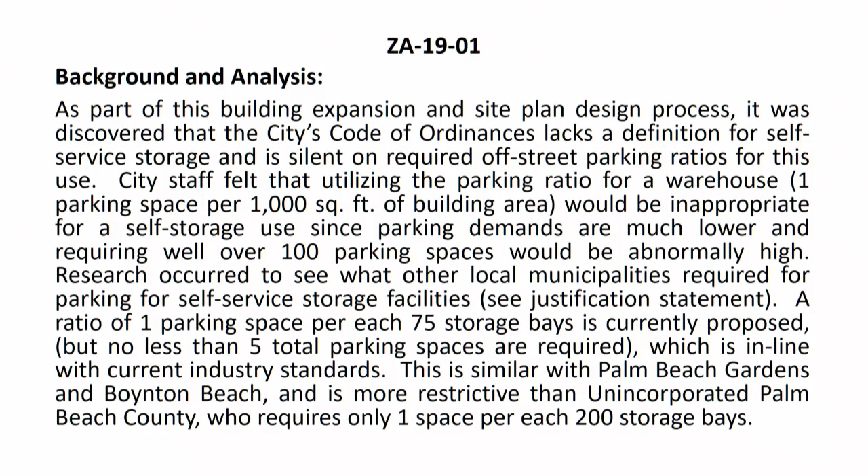We looked at a storage category just for self-storage use, at a ratio of 1 space per every 75 units, with the caveat that some municipalities use a much more flexible ratio where they allow 1 parking space.

Finally, the off-street parking ratios would be amended by adding the new minimum of 5.

So we'll go ahead and start with Mr. Wiley. I have no questions at this time. Okay, Mr. Hunt?

Here's an aerial view of the site. And as we get a little closer, you can really see that the new ownership group does want to improve the site. Previous ownership group did not maintain it to standards that most would, so we're happy to see that the new ownership group is here and they're looking to renovate this site. Kind of excited about the new building facade and landscape package. I think it'll be a really nice addition to Blue Heron.

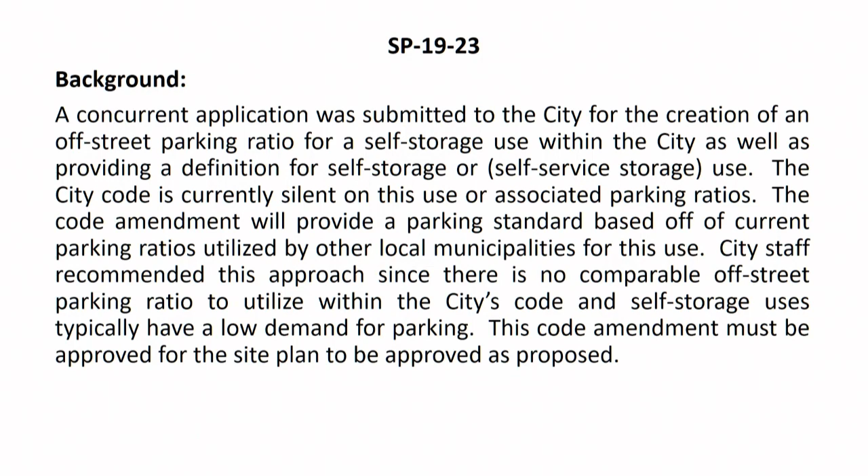Again, this is taken directly from the staff report. I did just mention the facade improvements and the landscaping improvements. In total, if this proceeds, it will result in 120,983 total square feet of building area for self-storage use. This is referring to the fact that the concurrent application was provided for the text amendment that was just discussed by the board, and it is really tied to that ordinance proceeding because there are site characteristics that are reliant on that ordinance proceeding.

So for the record, here is the site plan. This is just zooming in a little closer for everyone's ability to see it because the text is rather small. I do call out here, this is the existing building area in yellow, and the new proposed addition is called out in green. As discussed previously, it does form almost a horseshoe pattern where most of the internal storage use would be shielded from view from the street. Additionally, there'll be heavy landscaping as well as fencing around the interior storage areas.

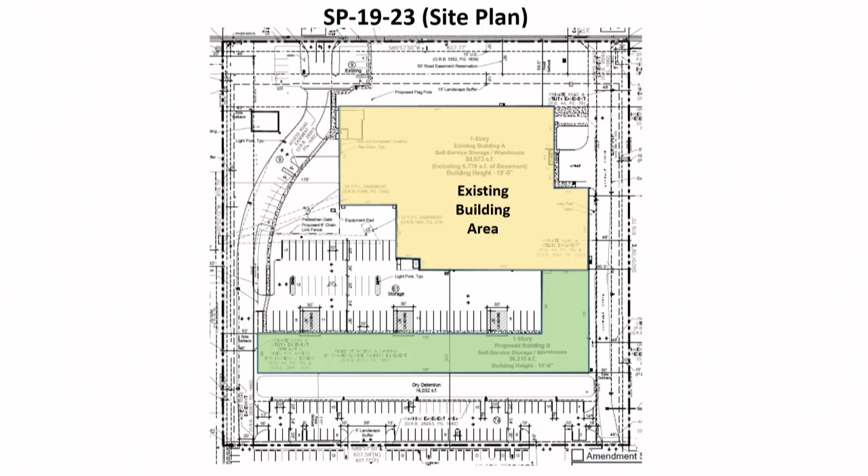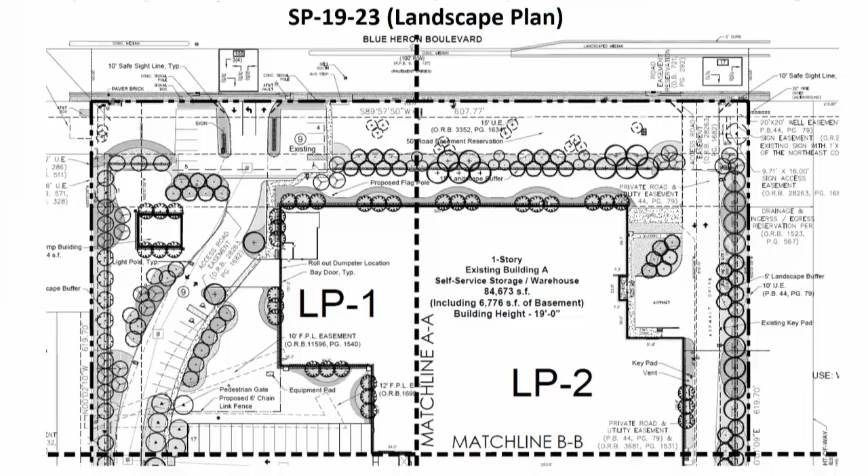For your record, the landscape plan is attached as Exhibit B, and here are the 4 cut sheets because it's a larger site. What I did here was zoom in on 2 of those cut sheets that front Blue Heron Boulevard to really allow the board and general public to see how there will be a new landscape facade included. That's following our principal arterial design overlay guidelines, which were approved, or amended, a few years back to really push future development to provide a nice landscape package and to try to create a uniform design along Blue Heron Boulevard.

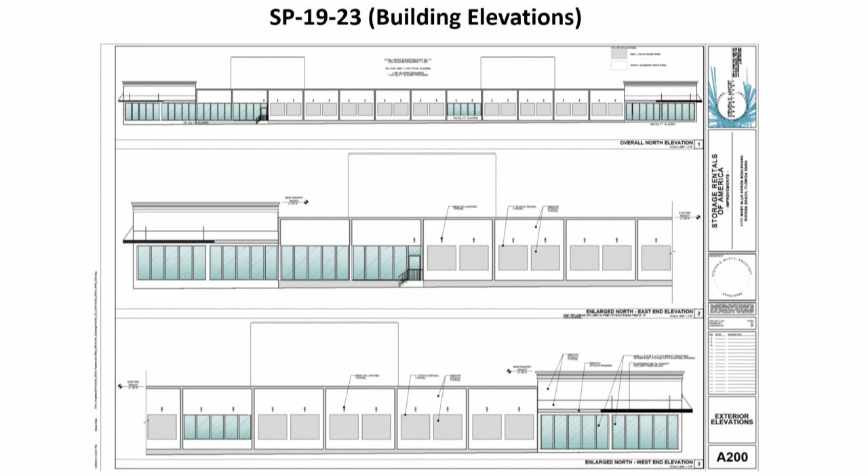Here is the proposed building elevation for the site. The top image is the full view from Blue Heron Boulevard, and the next 2 are just the sides of that top building elevation. What we did here is provide a comparison of the existing building facade with the proposed. The proposed is up top. You can see it'll be a nice, really clean design. There'll be much glass exterior, and what isn't really demonstrated on the rendering is how the landscaping will really improve the site and shield a lot of the building from view, more or less.

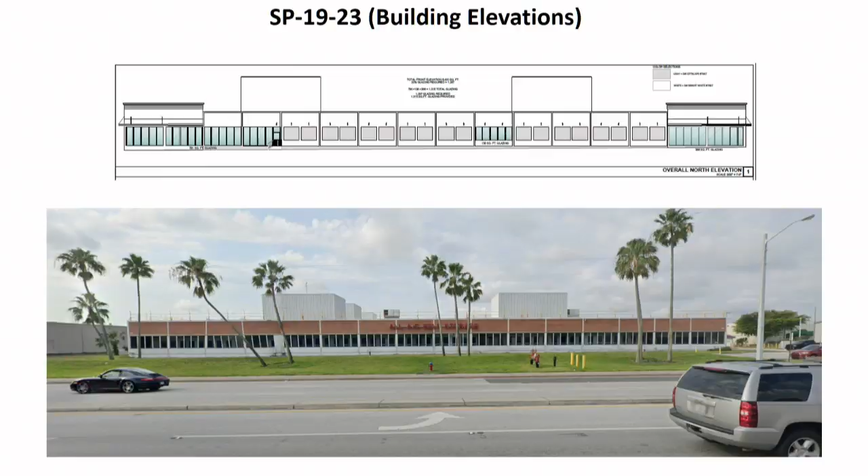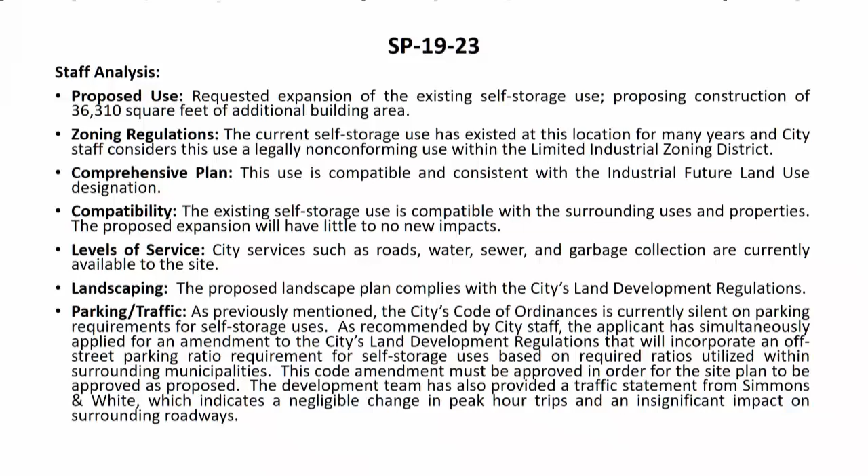So just for the record, the staff analysis is provided from our staff report in the PowerPoint, and staff is recommending approval with the following conditions. The first is that a 2-year landscaping performance bond for 110% of the value of landscaping and irrigation shall be required before a certificate of occupancy or certificate of completion is issued. The second is that construction and landscaping improvements must be initiated within 18 months of the effective date of this resolution, in accordance with section 31-60B of the city's code.

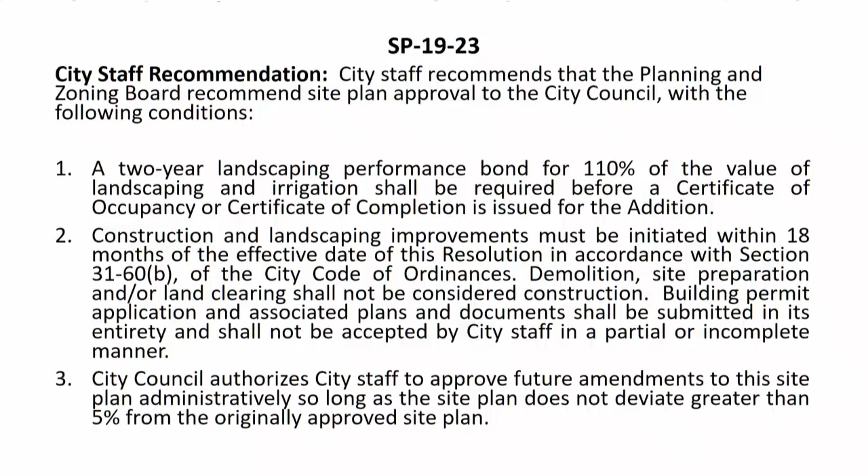Number 3 is the city council authorizes city staff to approve future amendments to the site plan administratively, so long as the site plan does not deviate greater than 5% from the originally approved site plan. The fourth is that this development must receive final CO from the city for all buildings and units approved within 5 years of the approval of the adopting resolution, or that adopting resolution shall be considered null and void.

Number 5 is all future advertising must state the development is located within the city of Riviera Beach. Fees and penalties in accordance with City Code Section 31-554 will be levied against the property owner and/or business for violation of this condition. Number 6, once approved, this resolution shall supersede any previous site plan approval resolutions associated with this property, causing previous site plan approval resolutions to be null and void. Number 7 is that the applicant shall consult with the Riviera Beach Police Department in order to incorporate one or more internet protocol, IP, cameras, within their site design for Riviera Beach Police Department use.

Number 8 is the concurrently processed ordinance associated with creating an off-street parking ratio for self-storage use, which must be approved and adopted prior to the site plan approval becoming effective.

And finally, number 9, prior to the approval of city building permit, the applicant shall provide a drainage report sufficient to demonstrate compliance with the city and South Florida Water Management District regulations, specifically demonstrating compliance with City Comprehensive Plan Infrastructure Element Policy 1.5.3.

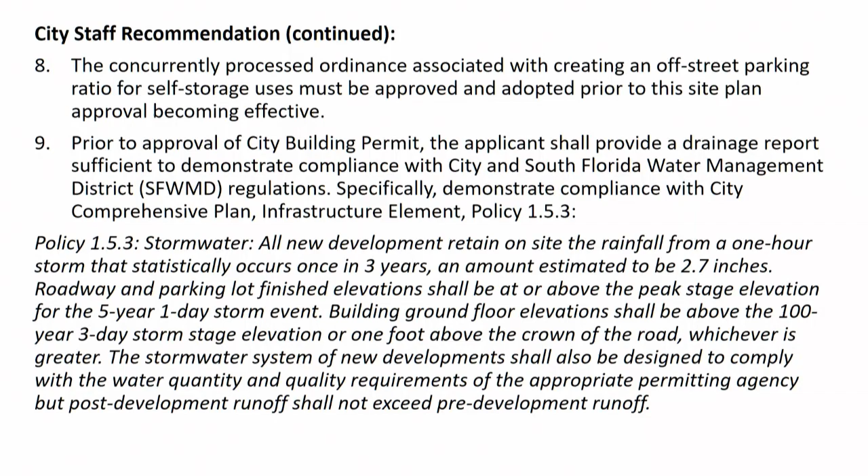So the applicant is available to answer any questions, and I'm also here to answer any questions at this time.

Okay, so there are no public comment cards on this item, so we'll go ahead and hear from the applicant if the applicant would like to speak. Yes, Madam Chair, they would like to present as well.

Thank you, Jeff, I appreciate it. For the record, Josh Nichols with Schmidt Nichols.

Again, just showing, I thought this was great that Jeff had this in here of the current condition. As you can see, it's a little dated, a little worn, and was in need of some updates. So it's just good to see, this and the next project you're going to hear are both in this immediate vicinity on Blue Heron, and really going to spruce up the corridor.

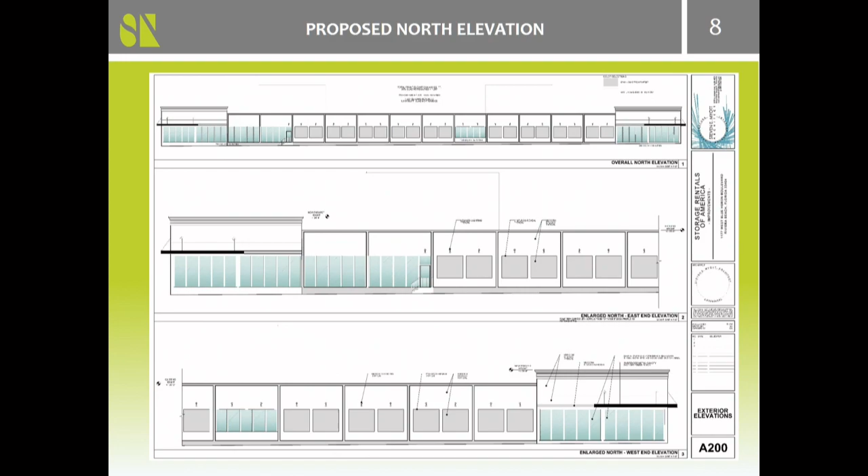So again, with that, just wanted to mention those few items. I'd be happy to take any questions. Thank you.

We'll start with the board comments with Mr. Wiley. I don't know whether this question is for yourself or Mr. Gagnon. I want to ask, the building that's located directly behind you, who operates that building? Do you? Yeah, so let me go back to the site plan. So that's a FedEx distribution facility. Okay, so and again, I didn't bring this up because it's not really part of our project, but there is a cross parking agreement that was entered into between the subject parcel and the FedEx.

So those additional spaces are for the use of the FedEx, and there's 2 access points through the subject property to allow them access. Okay, because I actually used to manage that FedEx back there. That's why I was asking to see if it was still back there. Absolutely. The question I have for you, there's a lot of traffic going through there for FedEx throughout the course of the day, even usually late at night also with late trucks coming in, especially at Christmas time.

Is there a security separation between coming from your entrance there for your building going to FedEx? Is that separated, or is that something that you guys are going to share? No, so this drive is obviously open, right, to keep, but there is fencing that comes, it touches the building here, connects, comes over, and then crosses here and connects here. So this entire yard area, I guess you could say, is all fenced in and secured.

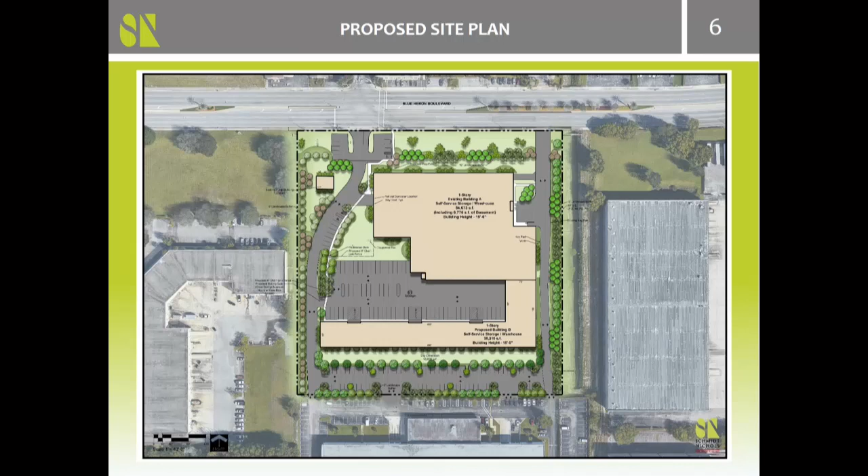All right, so now with the trucks coming through that area, because like I say, some of the trucks are pretty large, would those vehicles there be protected also? And was it made to actually accommodate those larger vehicles going through there without any damage to any other vehicles or any private property in that area? Absolutely. So that's a standard size drive aisle, and there's actually an access road easement, and that encompasses basically that driveway. So we maintained, just looking for, it's 20 feet in sections, and it looks like it goes out to 24 feet in some other sections.

So there's plenty of room for trucks to be able to maneuver through there. So we had to maintain that as part of the access easement. So during certain parts of the day, what was your access for that building? Will it be 24 hours? No, not 24 hours, no. What would the later hour be? 9 a.m. to 5:30 p.m.

To 5:30. All right, because I just wanted to see if that would actually interfere with the FedEx building, with the vehicles that are coming in at that time, and would that traffic coming through that area hurt your operation? It's a very low traffic generator, the storage, and they're currently operating now with this same situation. So, you know, we will be adding a little bit of square footage, but I don't think it will impede on anything. Okay, just want to make sure.

Thank you. Mr. Hunt? Yes, I applaud your mention of the tie-down hooks and things of that sort, so I would strongly encourage you to take a look at that as a good option, and if so, perhaps suggest it back to the city for something that we should consider for future projects and things of that sort. I mean, I think that's a very prudent strategy. Still does not absolve the owner of the vehicle or the boat from paying good attention, but having that there makes it a lot less easy to ignore. Absolutely. That's all I have.

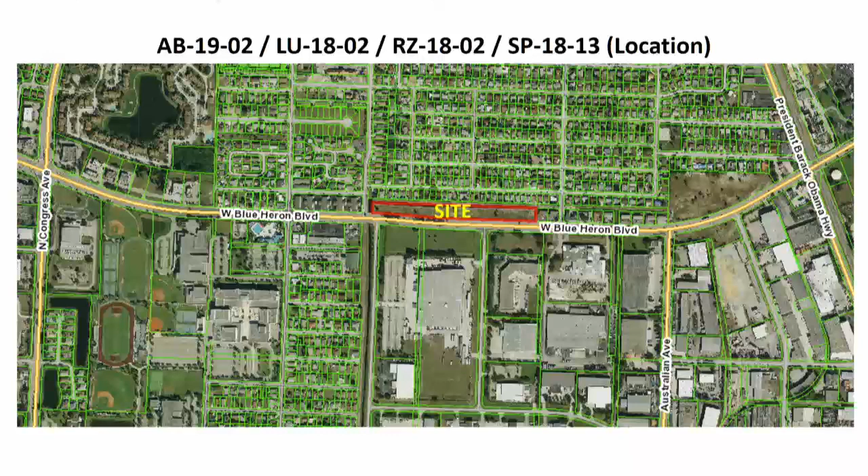So you have before you a location map depicting the site. As we go a little closer, you can see it's on the north side of Blue Heron, just south of West 23rd Street, bookended by Avenue O and R.J. Henley Avenue. From this aerial, you can somewhat see there is a canal running on the north side of the property, and we have a few other images later on that depict it a little more clearly.

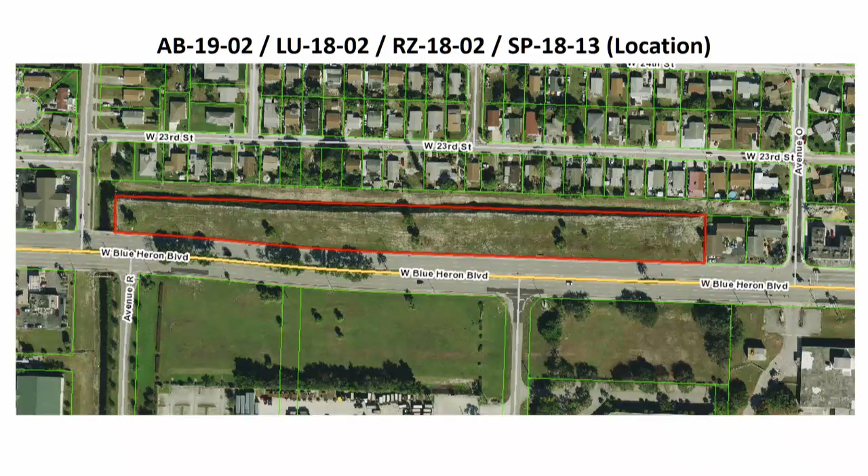So this image was taken just from Google Earth, and if you're familiar with the site, you will understand the true length of the parcel. I believe it's approximately 1,400 feet in length, plus or minus 100 feet or so.

So this is a very long, linear piece of land. We believe that the length of the property and the format of the property has provided difficulty in development. So we're trying to come up with some solutions to that.

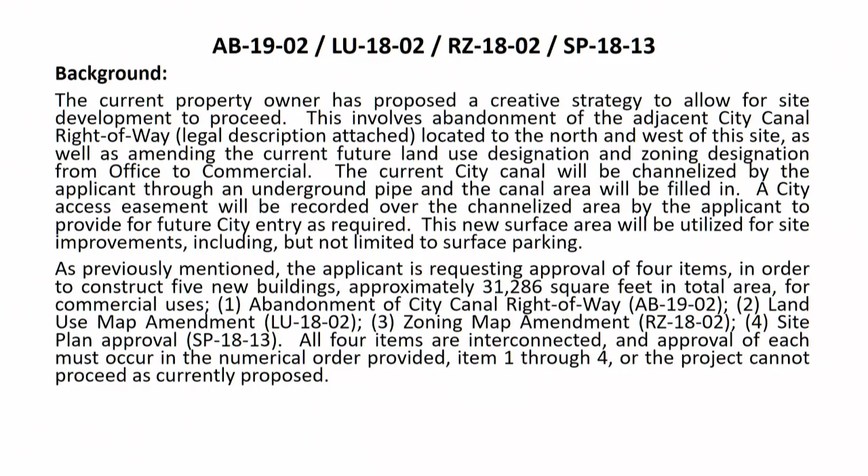And the design team will be able to expand upon some of the buffering that's proposed with the adjacent residential uses to the north. They're also looking into the best approach to ensure that there's no water management issues to those properties to the north, and the design team has a strategy for that as well.

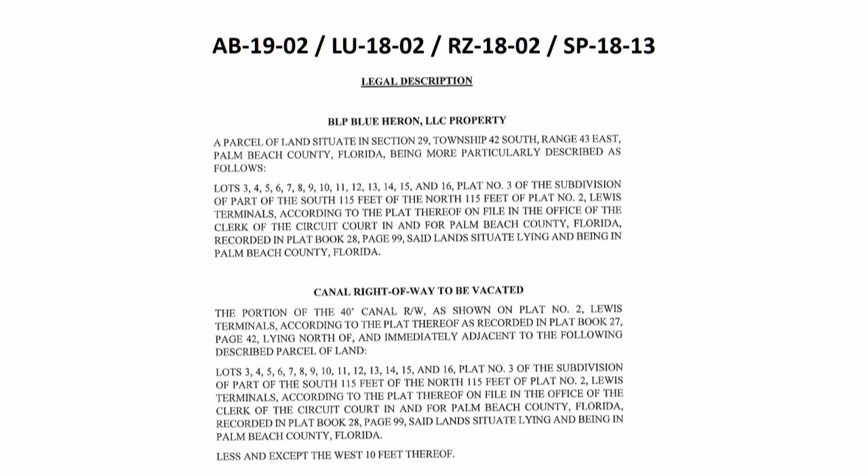Just for the record, the legal description for both the parcel and the proposed canal right-of-way to be vacated is provided in the staff report and also provided before you tonight.

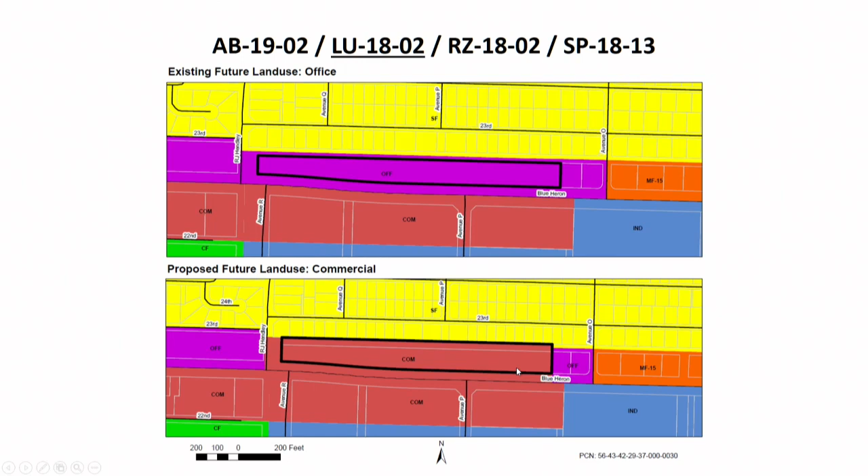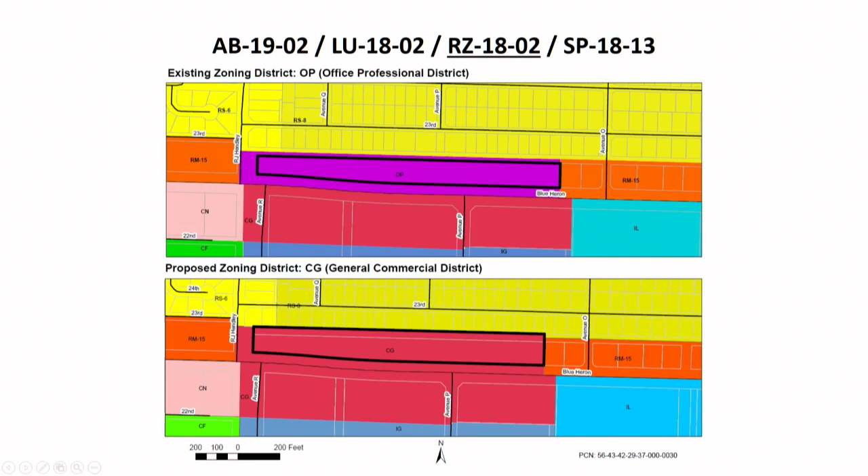This image is depicting the zoning map of the city. The above image is the current zoning of office professional, shown in this magenta color. The proposed zoning amendment would result in a general commercial zoning designation as demonstrated with this red color on the bottom image. As you can see, the future land use and zoning directly to the south also would be consistent with general commercial or commercial for future land use and zoning.

So the staff analysis, again, was taken from the staff report. As far as services, the existing city services required to develop the site all exist. The ultimate use is really for commercial, retail, restaurant, and medical type use within these 5 standalone buildings.

Staff believes that if the zoning amendment proceeds, the development would be consistent with zoning regulations. Similarly, the comprehensive plan would be compatible and consistent so long as the desired comprehensive plan amendment also proceeds. We see that this redevelopment of the site would be compatible with the surrounding and adjacent uses, and additional attention will be provided to ensure that compatibility is maintained, especially with the residential uses just to the north.

We touched upon it briefly with the other project, but the landscape design is going to be in line with our principal arterial overlay standards, so we think you'll be very pleased with the landscape palette that's provided. Parking and traffic meet the county's traffic performance standards, and the traffic performance standard review letter is provided within the packet tonight.

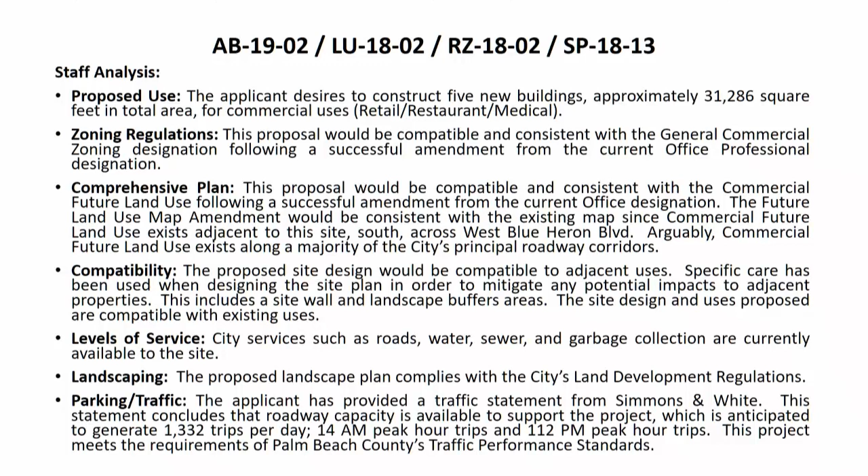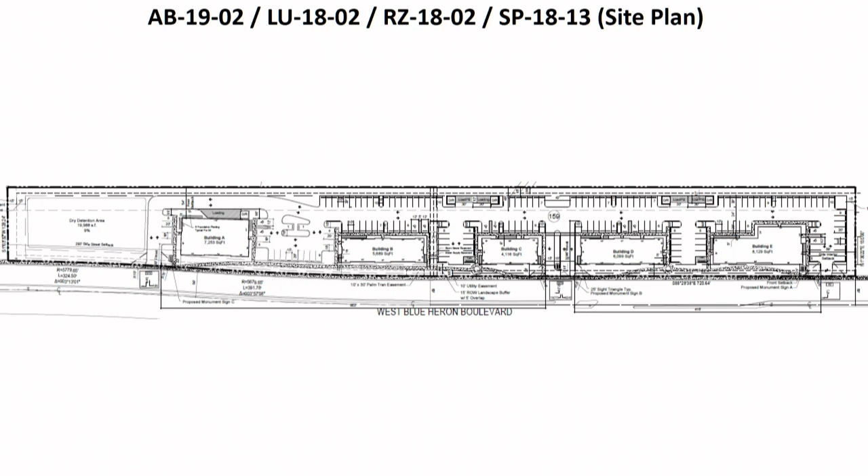That's because you don't have water. Yeah, I have my side water here. Maybe I just need to take a sip from it. We don't have water, that was the hint. I'll share mine if you'd like to. We can get water. Okay, we will get water, thank you.

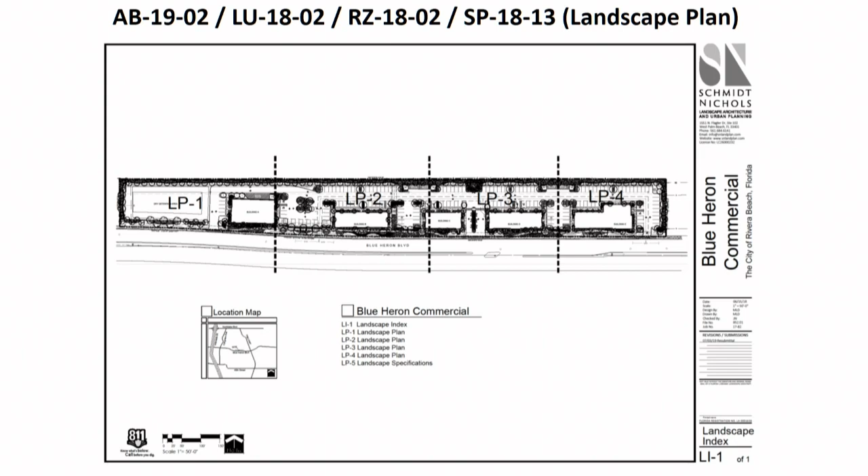For the record, before you is a landscape plan. Because it's such a long linear site, there are 4 sections. I have zoomed in on that so you can get a feeling for the landscape design and landscape palette. The design team likes to hoard their nice color renderings until their presentation, and they don't share them with me, so I'm sure they'll provide them in their presentation.

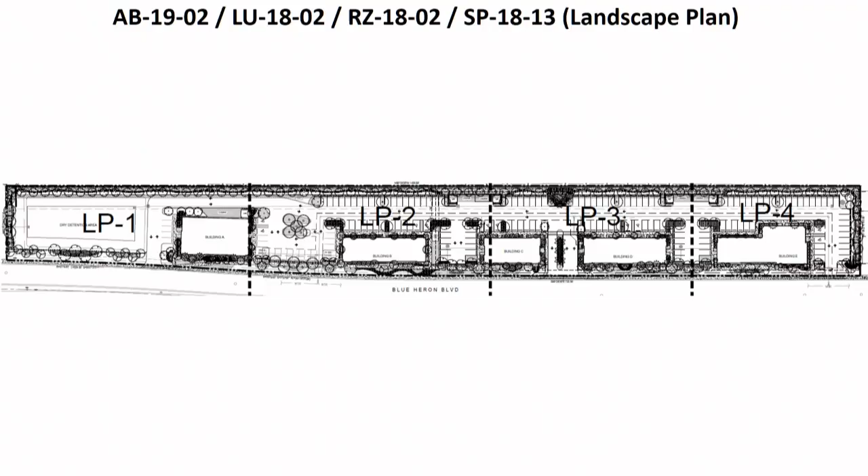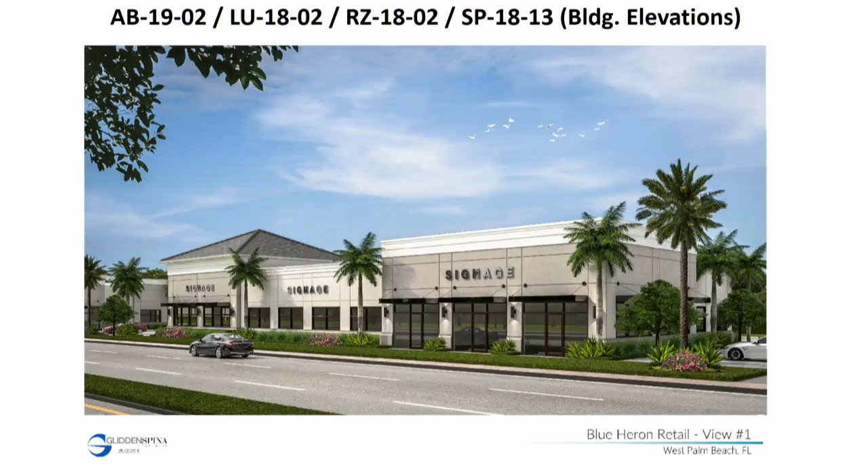But I think you'll be really pleased with the landscape proposed as well, and also with a lot of the treatment to the north side of the site, where we were very conscious of the existing residential community. We want to make sure there really are the least amount of impacts as possible for use of this site, and that any anticipated uses would have been mitigated in some way, shape, or form. So here is a rendering of the site. This is going from...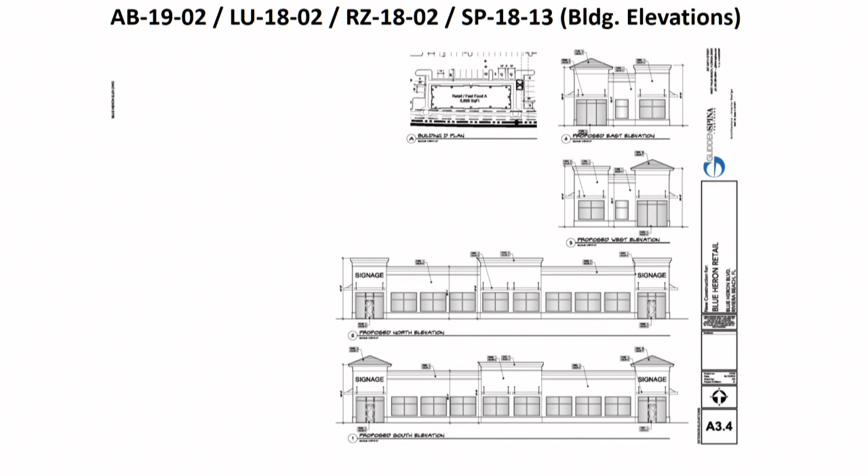So the building elevations, they're not really as pretty and colorful as the rendering, but I want to provide them for informational purposes and for the record. Each building has its own building elevation sheet. So this is sheet A3.1, A3.2, A3.3, A3.4, as well as A3.5. All the building design is consistent, and they will all be the same design as demonstrated before.

At this point, I'd like to continue with staff recommendation for each item, and then we can go into board comments and public comments on each individual item respectively, if that pleases the board.

So city staff's recommendation for the abandonment proposal, which is AB-19-02: city staff is recommending that the P&Z board recommend approval to the city council of this canal right-of-way abandonment with the following conditions of approval. The applicant shall provide a city access easement identical to the legal description of the city canal right-of-way abandonment area in order to ensure access in perpetuity following city council approval and adoption. Prior to the city canal right-of-way abandonment becoming effective, the applicant shall prepare and ensure recordation of the city's access easement within the official records of Palm Beach County, with proof provided to the city's Development Services Department.

Condition number 2: following city council approval and adoption of this abandonment ordinance, and prior to the city canal right-of-way abandonment becoming effective, the applicant shall provide the city with a construction performance bond for 110% of the value of the cost to channelize, or pipe and fill, the existing city canal. This performance bond may be utilized by the city to pay for channelization of the city canal in the event that the applicant fails to complete the channelization of the project within 2 years of the effective date of this ordinance. If the city utilizes the construction performance bond, the applicant also authorizes the city to place a lien on the property for an amount equal to any additional channelization and fill construction costs that exceed the value of the bond. This condition intends to further incentivize the applicant to complete the channelization or piping project and helps protect the city from financial risk.

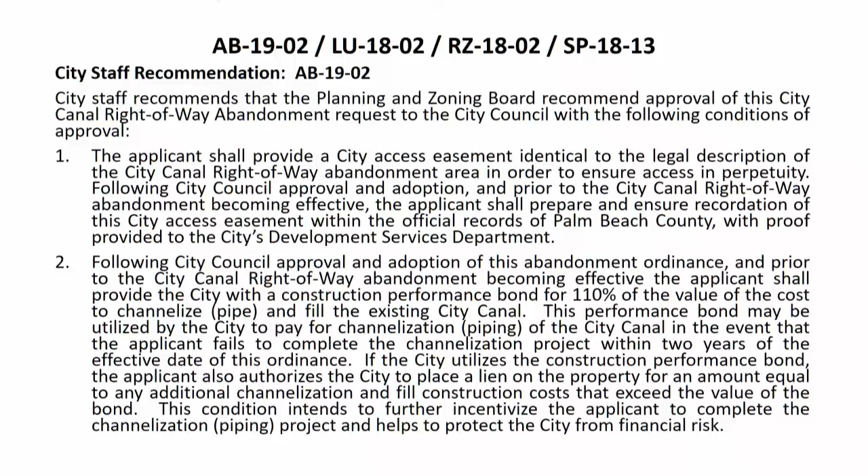Condition number 3: the applicant is responsible for any and all costs associated with channelization or piping of the existing city canal. The water management capacity of the newly piped canal shall be equal to or greater than the capacity of the existing canal. The final design of this infrastructure improvement shall be approved by the city's Public Works Department. The applicant must apply for and be issued one or more building permits prior to any site work commencing for channelization or piping of the existing city canal.

Condition 4: the applicant shall replat the city canal right-of-way abandonment area, AB-19-02, with the adjacent parcel known by PCN 56-43-42-29-37-000-0030, prior to the issuance of a certificate of occupancy for this location. This replat shall include the city's access easement that was required as a condition of approval for the abandonment.

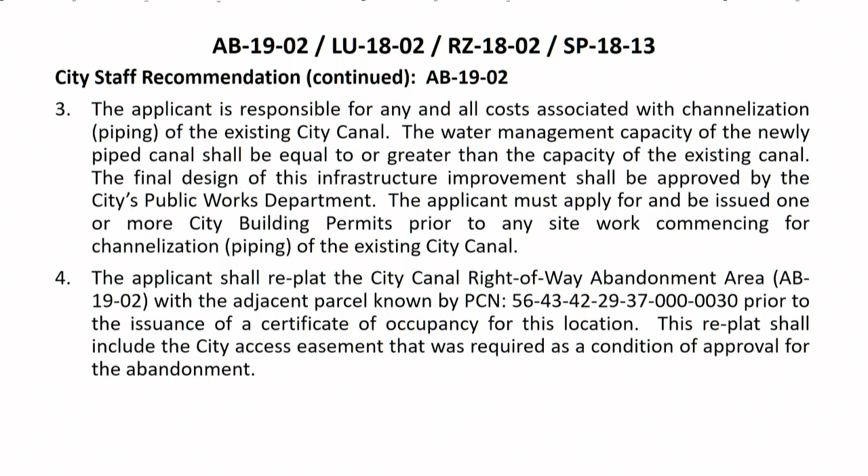That ends the conditions of approval and recommendation for the abandonment. Staff's recommendation for the future land use map amendment is that staff recommends the Planning and Zoning Board recommend approval for the future land use map amendment to the City Council, from an office designation to a commercial designation. That's staff number LU-18-02.

The next recommendation pertains to the rezoning request, which is RZ-18-02. City staff recommends that the Planning and Zoning Board recommend approval of the zoning map amendment to the City Council, from office professional to general commercial.

The fourth item is the city staff recommendation for SP-18-13. City staff recommends that the Planning and Zoning Board recommend site plan approval to the City Council with the following conditions. The first is a 2-year landscaping performance bond for 110% of the value of landscaping and irrigation shall be required before a certificate of occupancy is issued for the site.

The second condition is construction and landscaping improvements must be initiated within 18 months of the effective date of this resolution, in accordance with section 31-60B of the city's Code of Ordinances. Number 3, the City Council authorizes city staff to approve future amendments to the site plan administratively, so long as the site plan does not deviate greater than 5% from the originally approved site plan.

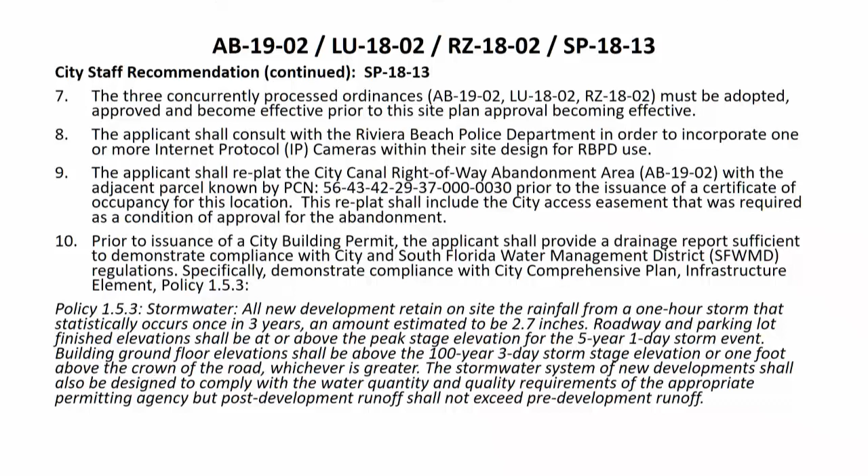Finally, condition 10: prior to the issuance of a city building permit, the applicant shall provide a drainage report sufficient to demonstrate compliance with the City and South Florida Water Management District regulations, specifically demonstrating compliance with City Comprehensive Plan Infrastructure Element Policy 1.5.3, which is listed in full for reference. That concludes staff's presentation.

I know that the applicant would also like the opportunity to present to the board at this time. We would love to hear from them.

Mr. Bain? Thank you, Jeff. Probably need to push to get it started. This up here? Yes, sir.

Good evening, ladies and gentlemen of the board. For the record, Seth Bain, with the firm of Lewis, Longman & Walker, here on behalf of the applicant. I'm joined tonight by the applicant, Mr. Stu Hankin. Josh Nichols of Schmidt Nichols is here as well, the site planner. We have the builder, general contractor with us tonight. And we also have Kyle Duncan from Simmons & White.

I obviously appeared before you very recently to discuss this project. At the conclusion of that workshop hearing, I left the building with my client. Then when I was reading the transcript a few days ago, I realized you had a very extensive and well thought out discussion about planning, the role of planning in your city, and the various jurisdictions involved in that. I know Mr. Hunt did a yeoman's amount of work exploring that. When I read that transcript, I realized there were a couple of very important concepts discussed that were extremely relevant to our project.

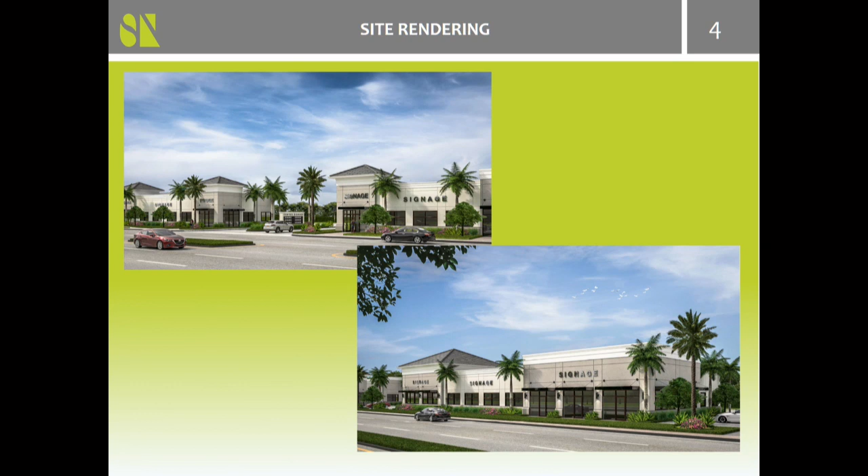We're trying to promote that sort of urban feel where you can see the buildings. You don't have a huge parking lot in front of them like some of your older traditional strip retail neighborhoods. You've got lovely architecture, a strong architectural landscape feel, and a meandering sidewalk through it.

The reality of this site is, even though it's extremely long, we're putting a far lower density than would typically be permitted in your general commercial zoning district, which allows a 1.4 FAR. That would be 200,000 square feet on this site of development, requiring many stories. We're maintaining a scale compatible with the neighborhood to the north that'll fit on the site, but the reality is the traffic generation by the site is very low, and there won't be a grocery store here, there won't be a Target, there's nothing attracting huge amounts of traffic.

These are smaller businesses that will attract people throughout the day—the sorts of businesses that, even if it were an office with a huge influx of traffic in the morning, that won't be the case here. The sorts of businesses here are the kind that will get a certain amount of traffic in and out throughout the day.

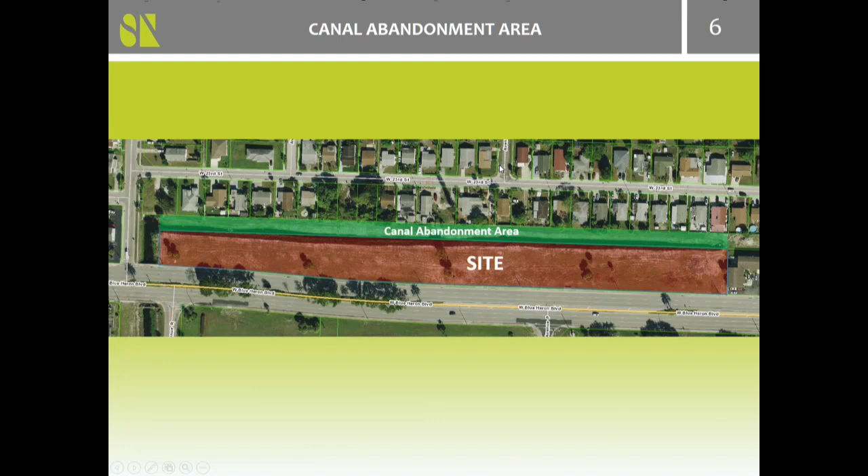That's the wrong button. That's it. Thank you. So now you're familiar—this is the site, we're asking for that 40-foot to be abandoned so it can be incorporated into it, with the conditions that Jeff has read before you this evening. We've reviewed those conditions and accept all of them as proposed.

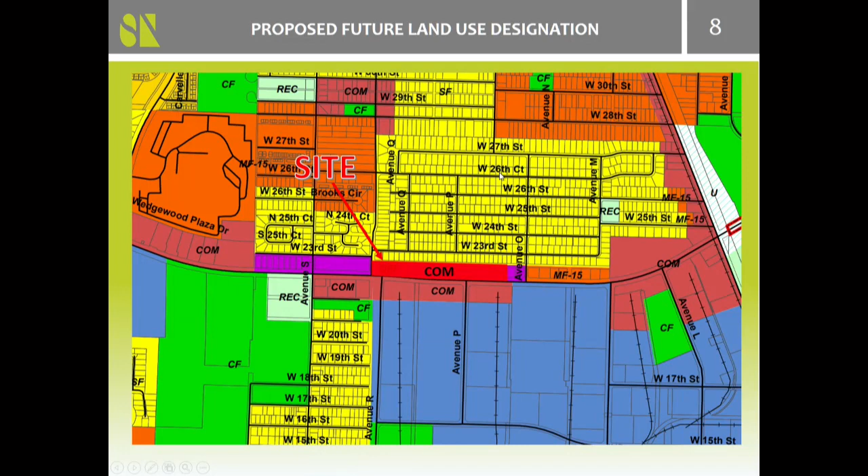This is how that site plan, how the rezoning and land use would be modified—again, consistent with what's along the corridor and what's across the street from it, just mirroring that and consistent with the uses in the area.

Going over again, we've had discussions with people throughout the city, and I think there's a certain amount of enthusiasm about the investment made into this corridor. And like I said, it's not the most intense use that could possibly be made, but because of the constraints of the site, it is still a significant investment. It's a significant improvement in the value of the corridor, and it's really beginning to make that overlay that was put into place come to life.

The traffic study was done, as Jeff alluded to. It was in your package this evening, and it met the standards. Because of the type of uses, the scale of it, and the distribution throughout the day, and the fact that this is the sort of project that captures trips as they go by and is not a huge draw from the region, it met the county's standards and was not considered a problem. The Department of Transportation reviewed the driveways and preliminarily approved them as well.

So we appreciate Jeff's comments. We believe that the site does improve the corridor and is an exciting opportunity for us, and we'd be happy to address any questions you may have. Thank you. Okay, thank you.

We do have 2 comment cards on the issue, so we're going to hear from the public before we have board comments. So first up with comments for items C, D, E, and F is Lynn Hubbard.

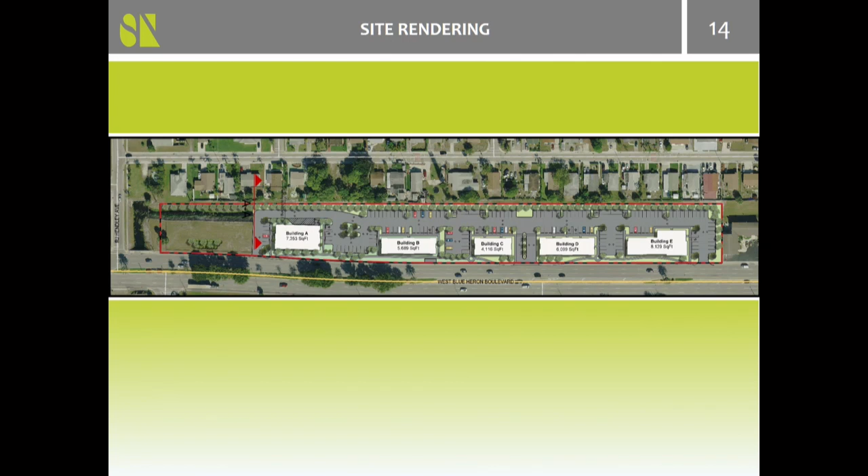And I think to the issue of the pipes, as we're building homes in these communities, I am also aware of the pipe issue. We've had to dig up a street recently and fix it all. The way the pipes run is through the actual line of the street, and then from the middle of the street, the cast iron pipes hook up to the city's connection. So in the back of the houses, there are no pipes running or connecting that way. I don't know for sure, but I don't think it will have an immediate impact because the streets are directly on top of the pipes. We're completely behind there, so there aren't any cast iron pipes running on or around the back of those properties.

And that's okay, that may well be. It's just to give the residents a comfort level, and also to give us a comfort level, because I wouldn't know. I just know what I experienced, because the pipes are on my property, and they did what they did. So it's just to give everybody a comfort level, I guess.

We'll explore the insurance - we'll be fully insured, absolutely. But off the top of our head, RGC's been doing construction in Palm Beach County for 40 years, and he's not aware of any specific product that insures surrounding properties from damage.

Well, I do know that insurance companies sometimes offer custom insurance coverage - there's a price for anything. If we clearly define the concerns we have, say 30 homes that are concerned there might be some damage from an impact, can we pay some premium so that if there's any claim they can basically cover that? Because for me, I just want the residents nearby to feel comfortable with it, and I would like to know what do they want to see in that area.